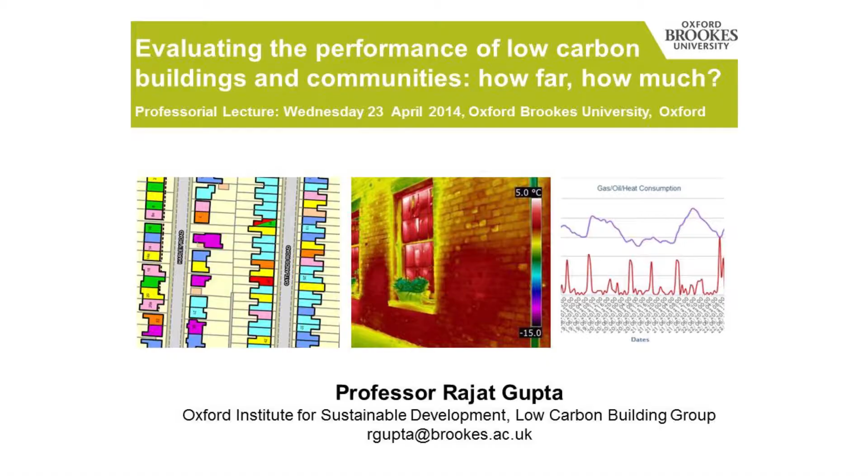What I want to do today is talk about evaluation of low carbon buildings in communities and look at that in some detail. I think we are probably beyond the point where we say, we should design sustainably, we should build sustainably. We have to. I don't think there's a choice. But how much do we evaluate the performance? That's why I've called it how far, how much.

What I want to do in the lecture is talk a little bit about our group. There's a lot of information in the refreshment area about our group, so you can find that, but just to give a flavor of OISD and our group. A little bit of background, linking climate change, energy use and buildings. Just lay out some research challenges within which we operate now and give some insights from our own research projects that we've been leading over the last few years. And then some final thoughts for future challenges and research.

So moving on to the Institute, quite a few familiar faces, quite a few people here who are from OISD. So I don't have to talk too much, but essentially to say I am based in OISD, I'm part of that as well. This is the university's flagship multi-disciplinary research institution, which brings together architecture, planning, real estate, and construction. So it was about 10 years back almost that it was formed as an institute.

And in 2008, a HEFCE report was brought out that regarded it as one of the UK's largest institutes. We are involved in most of the Research Council programs, whether it's sustainable urban environments, 1, 2, and 3 phases, energy research programs, living with environmental change, and also now lifelong health and well-being. A lot of information is there on the website, so I'm not going to go into lots here, but you will probably find something about sustainability at all scales within the institute.

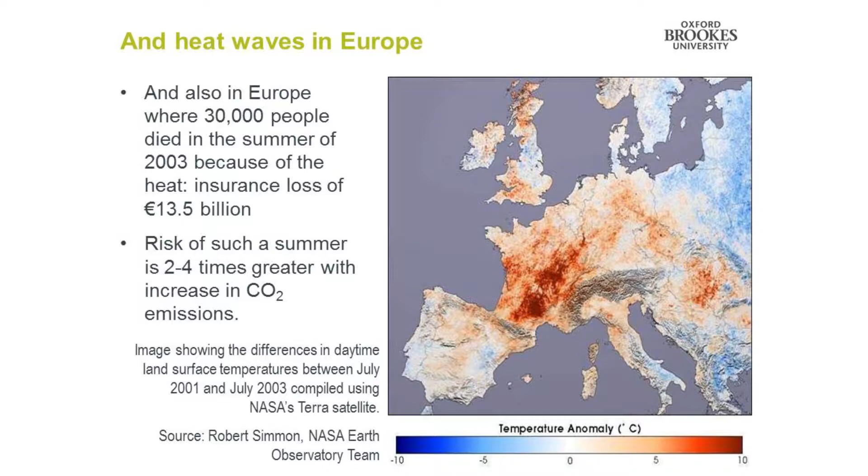Now, this is a slide you might have seen in many lectures. I think Sue and I probably started using it 10 years back. And these kind of impacts were felt that time. You would get flooding and other things. And then the 2003 heat wave occurred. And as you know, after that, something which we call excess summer deaths was coined as a term. And in this country, we get about 2,000 summer deaths.

And this kind of a summer, the current climate science confirms that this will become regular. So we have to be prepared to live in homes which are warm in winters and cool in summers as well.

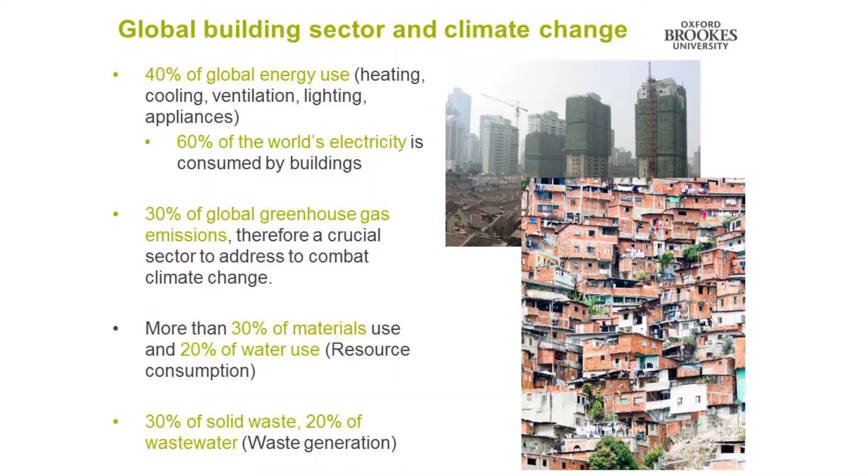Now again, why are we talking about all this? We're talking about all this because buildings are a large part of the problem. This could be anywhere. This is actually Beijing in China. And the reason is, if you look at the global building sector, 40% of energy use happens because of energy used inside buildings, because of things that we do in buildings. Buildings consume about 60% of world's electricity. About a third of global greenhouse gas emissions happen because of things in buildings. 30% of materials, whether you talk about resource consumption or waste generation.

So the point is, whichever angle you look at buildings from, the building sector is very important globally. And to be honest, the United Nations recognized it in their last report quite openly. And they said that the building sector offers the low-hanging fruit. Now, I don't disagree with them, but one of the things you have to be careful of is to come to this assumption straight away that reducing energy use is easy and cost-effective, because it might be cost-effective, but it isn't easy. It takes time, but it's important, not just for reducing energy use, for social reasons, economic reasons, for political reasons.

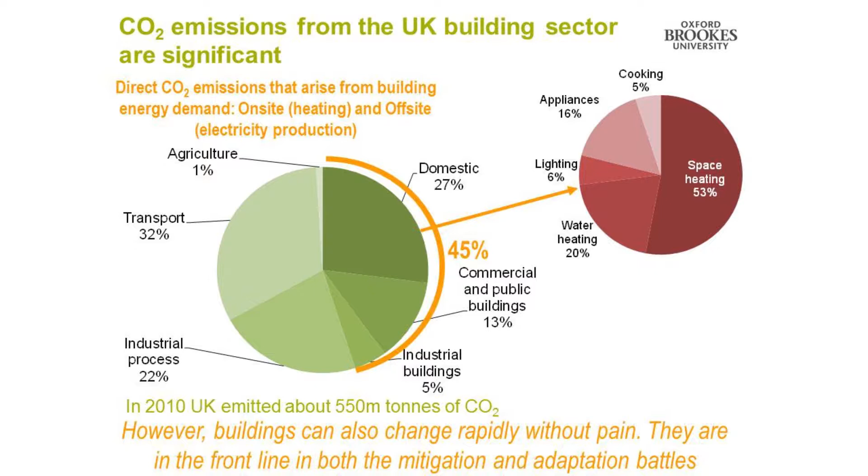Now, coming back to the UK, the building sector in this country is quite significant. About 45% of energy use happens in buildings, which is responsible for the carbon emissions. This can happen either when we heat the buildings, or when we're using electricity. Now, within the domestic sector, which is responsible for 27% of emissions, about 3/4 happens due to space heating and water heating, and 16% because of appliances. So building design is critical to achieving a good performance.

But the point is that buildings can also change rapidly without pain, and they are in the front line for both mitigation and adaptation. We spend about 90% of our lives inside buildings, so actually adapting them for the future makes complete sense.

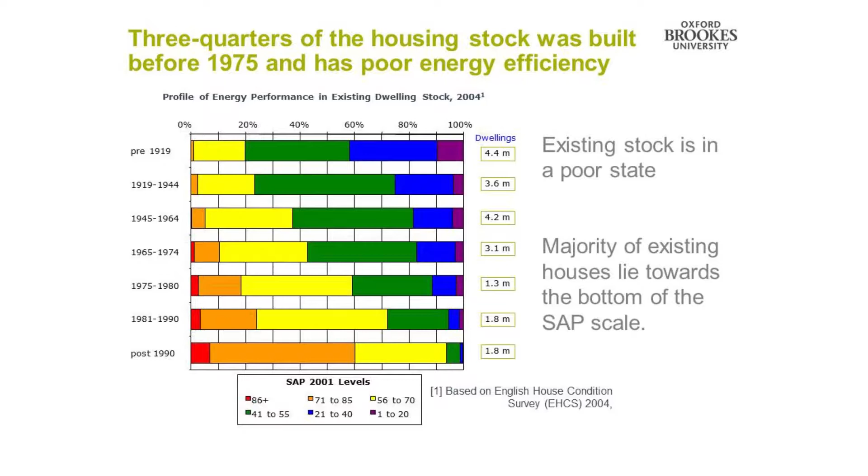Again, you might have come across this. This is an image showing the SAP ratings of UK properties. So in the UK, we have a SAP scale, standard assessment procedure, on a scale of 1 to 100. And as per the built form, you can see that most of the stock is actually in a very poor state. The red actually is counterintuitive. It means the SAP value is high. And that's a big job. The UK housing stock is actually the poorest in Europe. So a lot of work needs to be done to improve existing housing.

And there are drivers of change. Again, you may have come across this. The Climate Change Act, which requires greenhouse gas reductions by half in about 10 years, 80% by 2050, so another 35 years. And then we also have the UK Carbon Plan, which sets 5-year budgets for us.

But interestingly, one of the things it says is that by 2050, all buildings will need to have an emissions footprint close to zero. All buildings. That means 27 million houses and 2 million non-domestic. That's a big assumption they're making. It's there in the report. You can actually read it. The domestic sector is also required to reduce emissions by about 29% by 2020.

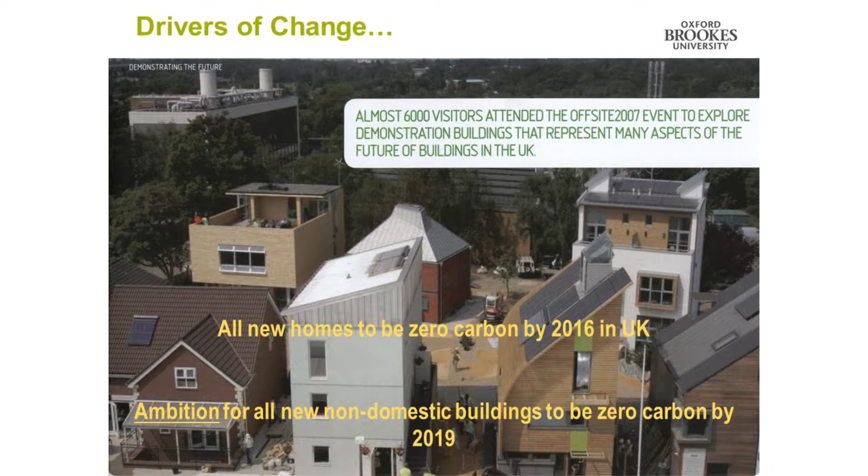So, lots and lots of things need to be done, which is why we have quite a bit of near legislation. The reason I call it near is because all new homes, for instance, need to be zero carbon by 2016. All non-domestic buildings, for instance, are required to be zero carbon by 2019. The government still has not defined what zero carbon exactly means. It's near zero carbon to some extent. But there is this ambition, target, aspiration, whatever we want to call it.

So the building sector is the centerpiece for a raft of legislation and a raft of government policy. And both existing and new buildings would need to be improved substantially. And that's where our research challenges come in. And I'm going to lay out some research challenges before I go into my projects. And first of which is the low carbon refurbishment context in itself.

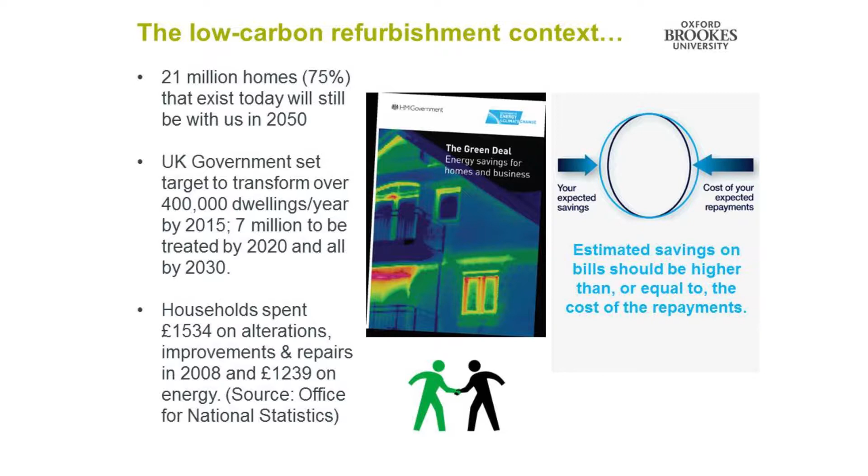As you know, we have about 27 million homes. 21 million homes will be standing by 2050, which means we need to do something about those houses now. Now, the UK government, interestingly, set a target. This is under the Labour government, actually. And the reason I keep this is because I think it is interesting to look at the scale of challenge. Over 400,000 houses a year to be done. So if you calculate 12,500 houses a week, that's just over one per minute. It's a lot that we are looking at in terms of improving the houses. So the challenge is quite big.

Now, we have to also put it in context of what people spend. On an average, people spent about 1,500 on alterations, improvements, and repairs in 2008. And that's the kind of money that people are going to spend to actually improve their houses. And we need to bear that in mind when we are designing these kind of programs.

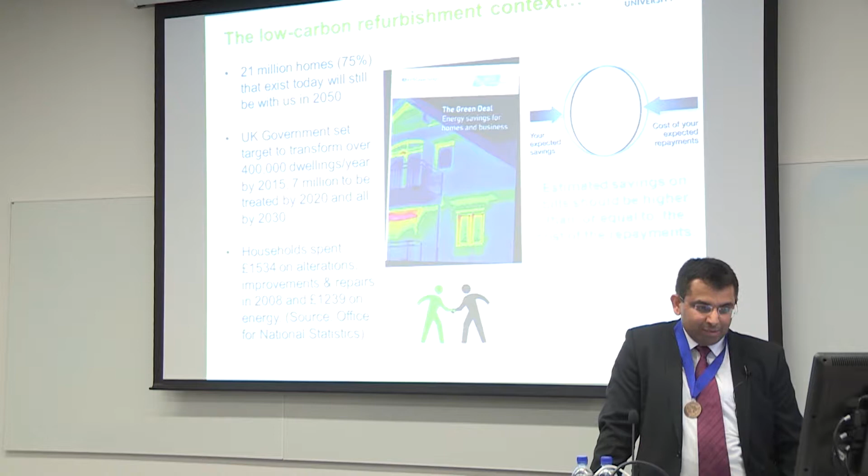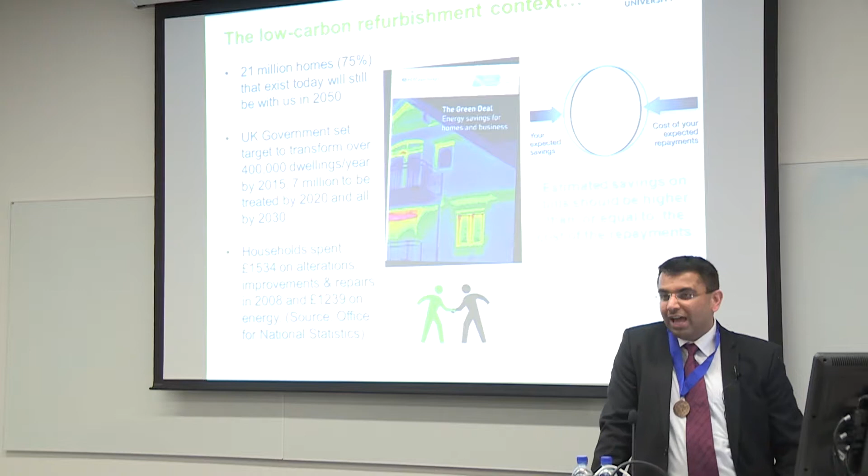Now, one of the things that you may have come across is Green Deal, which I'm not going to talk about in terms of judgment, whether it's been successful or not. But one of the things that Green Deal does is that it has a golden rule, which is quite fundamental to its success, which says that the estimated savings on bills should be higher than or equal to the cost of repayments, which means if the savings are not as expected, then people will end up paying a lot, and it is a financial model. So there is a lot of discussion about this, which is why the issue of performance gap comes in. But what is this challenge really?

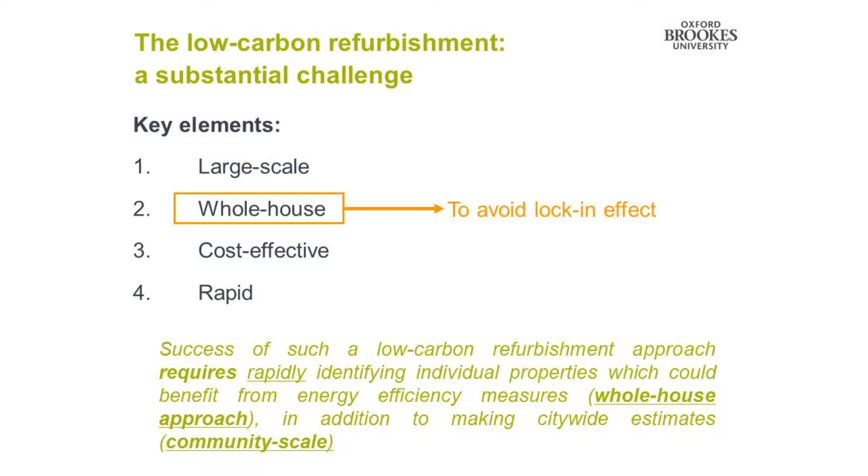We are looking at large scale, so I think it's not just about house by house. I've also always believed that if you have to do refurbishment, it's got to be whole house, because you spend a lot of effort in putting things together, putting up the scaffolding. It makes sense to do it. It also avoids something called lock-in effect. Lock-in effect is when you do unambitious improvements, so that buildings are not improved to their maximum or to their optimum level, and they underperform.

It's got to be cost effective, and it's got to be rapid, which is one of the reasons why my doctoral research actually looked at this, that we need to be looking at buildings in a way that we can identify the worst performing properties rapidly, in addition to making citywide estimates. So we need a tool by which you can say these are the houses that need to be improved, at what costs, and also at a city level or a community level.

But there is always a but, as you know. There's one big issue in reducing energy use in buildings, that it's a wicked problem. And as you know, wicked problems need wicked solutions. You actually can't solve wicked problems, you can manage them. And the reason why reducing energy use is a wicked problem are these three things, which quite a few people have talked about. Fergus Nicol said this some years back, that there is this dynamic relationship between buildings, occupants, and climate that determines energy use in buildings. So it's not just about technical improvements.

But then there is even more complication. People, building, and climate all come together to use equipment to provide whatever heating, cooling, lighting in buildings. Behavior is central to it, because all of that then works with behavior. And then the energy use itself can be determined directly by occupants.

They can open the window if the heating is on or the mechanical ventilation is on. So it needs a multi-disciplinary approach. You need a lot of disciplines to work together. Simply architects and engineers aren't enough. We need sociologists, psychologists, physiologists, and many others, economists, to work together, because it is a wicked problem. And it's very important to bear this in mind.

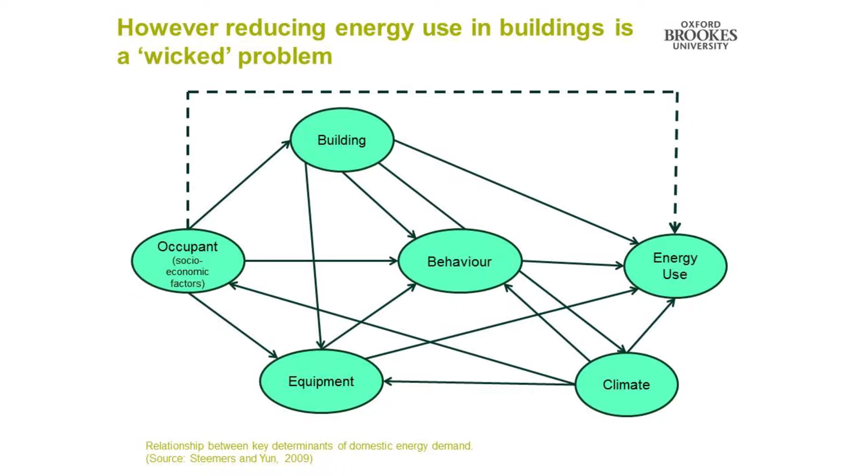I think when Steemers and Yun did it, they didn't realize actually the potential of what probably they had done. But I think this is a phenomenal advancement in our understanding of energy use in buildings. And that's why we get something called an energy performance gap, which is, some people say, an unintended consequence, but is it? Looking at the socio-technical system of buildings.

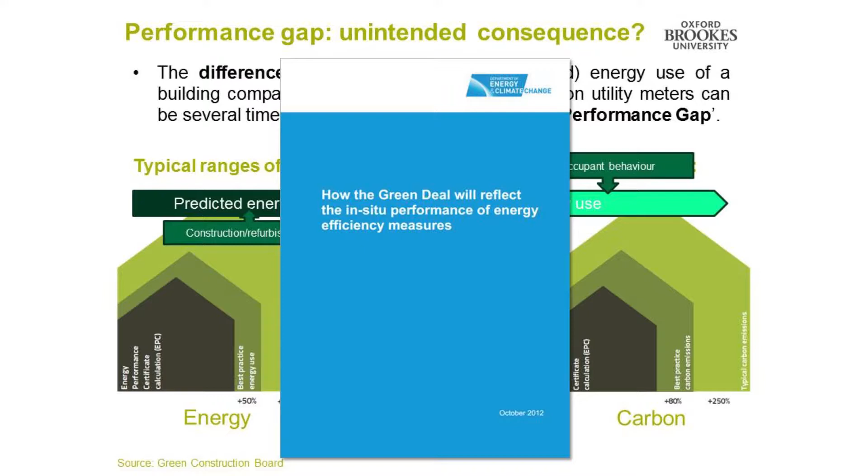Now, what is it? I'm going to talk about energy performance gap, but I think I need to define it first. It's the difference between the modeled energy use of a building, or the predicted energy use, compared to the actual energy that's recorded on utility meters. And it tends to be several times greater, not just one or two, several times. It is because of how the building is put together or refurbished, and occupant behavior, and a number of other things.

The Green Construction Board did some work recently, and they found that in non-domestic buildings, in terms of energy use, typically a non-domestic building will be using 200% more. 200%, that's a lot. In terms of cost, 240% more. Think of the accountants who are trying to estimate how much the running costs are. And in terms of carbon, about 250%. And I think they are pretty conservative. You can actually get much worse than that.

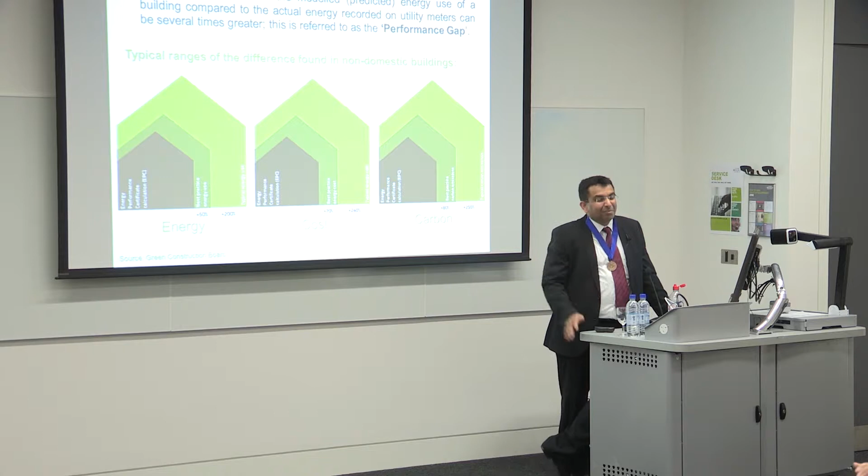So this is beginning to come into the system now. People are beginning to notice it. Whether something is going to be done about it, we don't know. But something is being done about it in Green Deal. Actually, this came out last year, and it came out very quickly. After Green Deal came out, the government released this, which said that people have to use correction factors when they are trying to estimate energy savings.

So if somebody is trying to calculate savings from cavity wall insulation, they have to drop the savings by 35%. Because of the performance gap, because we don't know what happens. And don't ask me why it's 35%, not 32%, because nobody knows why it's 35%. It was just seen as a convenient number. There isn't really proper science behind it. And that is why a lot of work needs to be done to quantify this energy performance gap. But it is beginning to be recognized. It is not something that is being ignored.

And it's widespread, but how does it matter? Sometimes people ask me, okay, it's there, but why does it really matter to us, people living in houses? It does, because if you look at it, and I think Zero Carbon Hub had done some good work in this area, one, it undermines the policy itself. So effectively, we are saying that you save virtual carbon, not real carbon, if you don't do it properly, and there's no feedback, and the building isn't followed through. It questions the role of even new housing, whether we can achieve our targets.

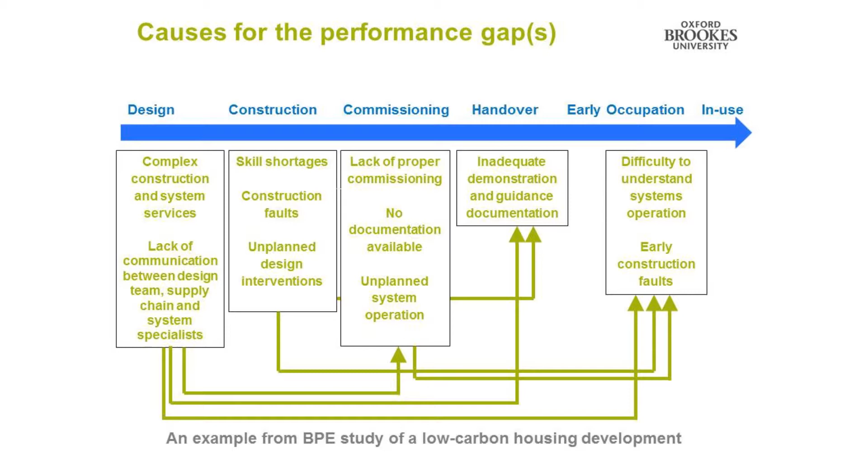Now, the causes are plenty, and that's what my whole presentation is about. So I'm just going to give you a summary of the causes. The causes are not because of occupant behavior only. I think that's a myth. Occupant behavior contributes to it, but it is not necessarily the main cause. It actually starts right at the design stage because of assumptions, because of lack of proper communication between teams, because of using unskilled or semi-skilled people to build things.

Big issues with commissioning, not just not commissioning properly, but the tools that are used for commissioning themselves aren't calibrated. There's no proper handover of the design intent to the user, so people don't have a clue how the building is to be used. This is very, very common. Hardly a user guide. Has anybody seen a user guide for a building? See, one.

And I know Mary because she works in the field, and two. Again, there's a big lack there. And then, of course, there are issues with the in-use stage and occupant behavior. But before we come to behavior, there are a lot of things in the chain, and that's what we've been trying to study. Now, the other thing we can't ignore while we look at reducing energy use and the rest of it is about adaptation, resilience, and other things.

And one of the key things that comes in is overheating. We did a project on climate change adaptation for suburban neighborhoods, and we would ask people in Delphi groups and focus groups about drought, flooding, and overheating, and damage because of storm. And people would always tell us, or most of the times, that we can see water, so we can do something about it. We can't see heat. And that's quite important, because I think that's where legislation becomes really critical, because the threshold for dying could cross without the person knowing. And that's why in Paris, quite a few people in the top floor flats actually died in their own houses in 2003.

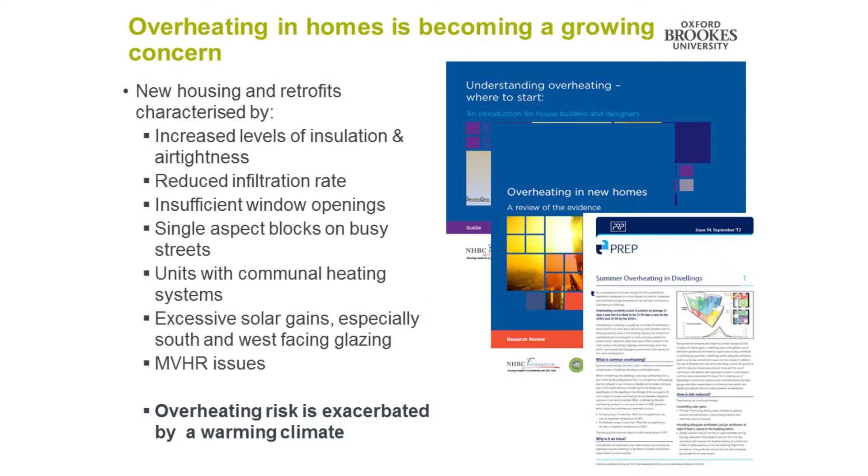Now, overheating is becoming a problem because, the first time I talked about overheating, I think somebody said, in this country, overheating cannot be an issue. It's all about heating a house, not overheating. Well, it is a problem because, one, we are building airtight houses, or at least we assume they're airtight. There's reduced infiltration rate. Window openings are becoming insufficient. I think window design is actually not good at the moment. You could have single aspects. There are issues with mechanical ventilation not working. Houses are also becoming smaller. The floor to ceiling height is reducing. So there is less space for stratification of hot air.

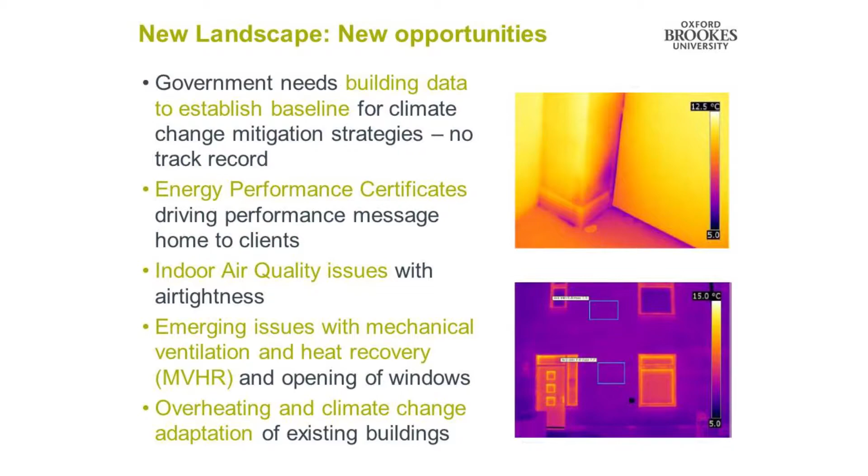And this gets exacerbated by a warming climate, where we're expecting temperatures to rise by about 2 to 5 degrees by the middle to end of this century. So this is again an issue that we can't ignore. So there's a new landscape, there are new opportunities, and that's where we operate. It is changing, but I think it's important that it changes. For instance, we need building data. We have to look at indoor air quality, and of course, looking at adaptation and performance of buildings itself.

Now, as I said, we have 20-plus projects. I'm not going to talk about them all. They are in these areas. I'm going to pick a few of them and talk about them. I'll probably start off with some of our international research, because John had kindly mentioned some of it, and I think it is important that we know what's happening outside of the UK, which is important for the UK itself.

I worked with the UN to develop this tool called Global Common Carbon Metric, because my PhD was on carbon counting. So I really wanted to develop a tool where anybody could measure and report carbon emissions of any building in the world. So the tool is very, very simple. What it does is that it can measure and report emissions. So you put in the area of the building or area of a city. You tell it whether it's domestic or non-domestic. As soon as you give the location, it looks up the carbon factor and generates indicators like kilowatt hours per square meter per year, and even kilowatt hours per occupant per year.

It has been applied widely, close to 400 square kilometers now, and it's being developed into an ISO standard as I speak. What it does is it provides a consistent way of counting energy use and emissions from buildings, so that we can baseline it and measure improvements against that baseline in a consistent manner. It's very transparent, but it works, and I think that's what is more important for us. As John had mentioned, we used some of this to develop the carbon neutrality standard by BSI, which is now having an improvement as well.

And then if we look at what's happening in terms of control and regulatory instruments, I think plenty is happening. The problem is implementation, probably. There's a lot there in terms of legislation and voluntary targets as well. But one of the common things I found was that there's a lack of consistent energy and buildings data across the 3 countries. That's common. Even in this country, we don't have good quality energy and buildings data on which to formulate energy policy. It tends to be for policy evaluation, not for policy formulation. So I think it's really important that data collection and analysis is now inbuilt into the systems of countries.

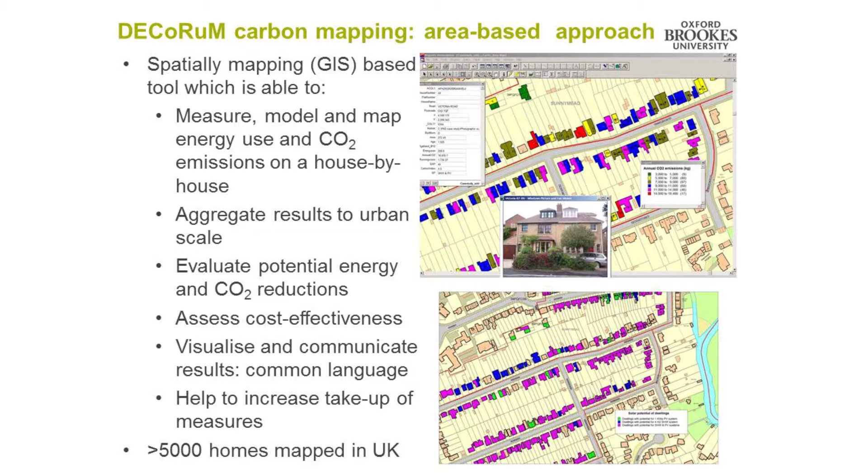I'll come to DECoRuM because that is the foundation of our work. And what really does DECoRuM do? It is a spatial mapping tool. So what I had done in 2005 was to bring 2 quite different fields, energy modeling and spatial mapping, together. And the reason I did that was because we wanted to empower cities, local authority planners, energy advisors with a tool by which they could model, measure, map energy use on a house-by-house level. So it doesn't do disaggregation. It does aggregation bottom-up, but doesn't do a top-down disaggregation. It's a very bottom-up tool.

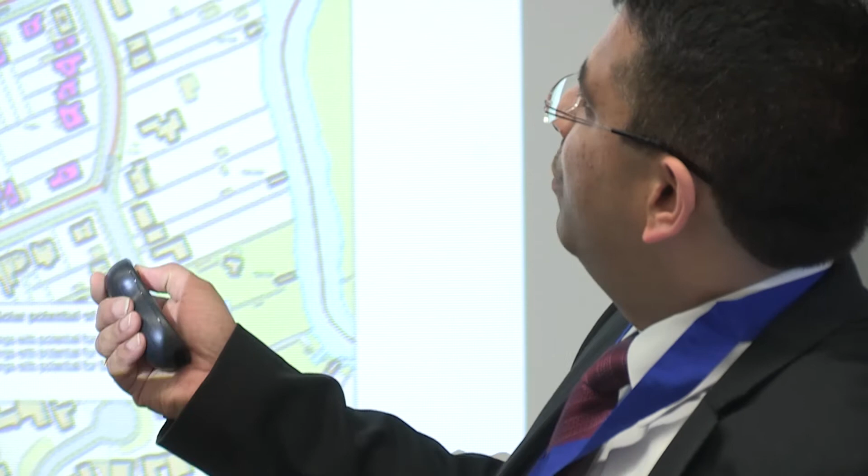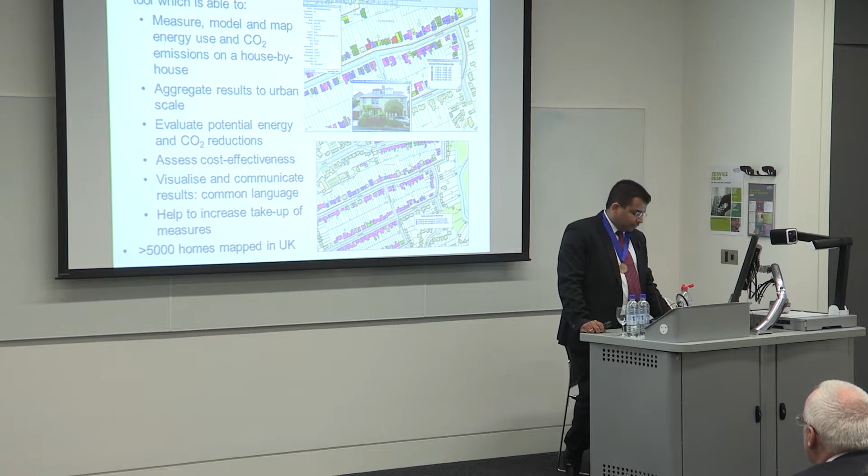It evaluates energy use and reductions on a house-by-house level, assesses cost-effectiveness, visualizes this, and sometimes even helps to increase take-up of measures. And to date, we've almost mapped about 5,000 homes in this country, some in the US as well. And primarily what the tool does is you can actually identify hotspots of, let's say the red ones are some of the houses which could take up measures. And then on a house-by-house model, you can run what a house can do in terms of energy savings and at what cost. But then we've now progressed it quite a bit.

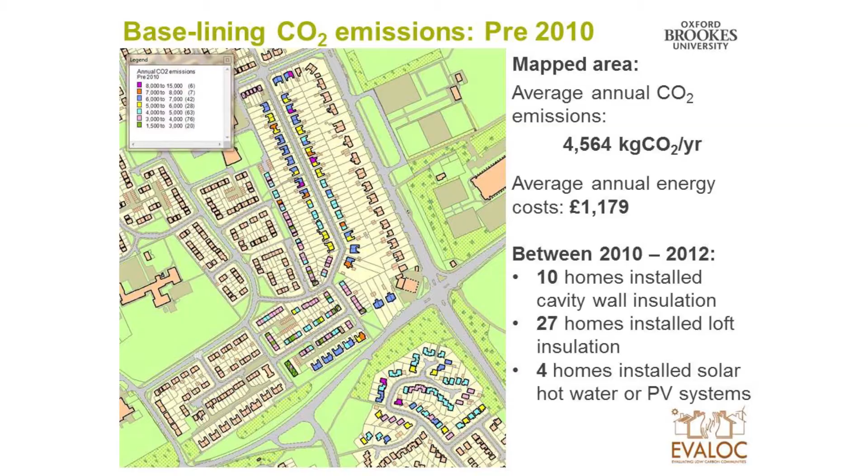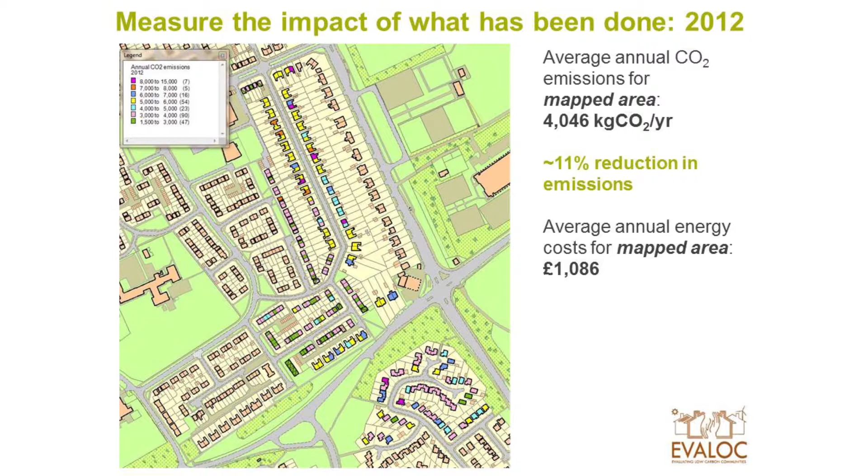This is what can be done, right? The model can also be used to identify what has been done. So we're working with community groups to identify what their baseline is. And with community groups, you have to shift the baseline because their action was taken in the past. And that's been a really interesting experience. So this is one of the community groups we are working with where we established that pre-2010, before community action started in an area, these were the average emissions, about 4.5 tons. And then some improvements happened. These are standard improvements, happening randomly in a community group. An 11% reduction in emissions over 2 years has been retained. So we are able to actually look at that in terms of what has been done.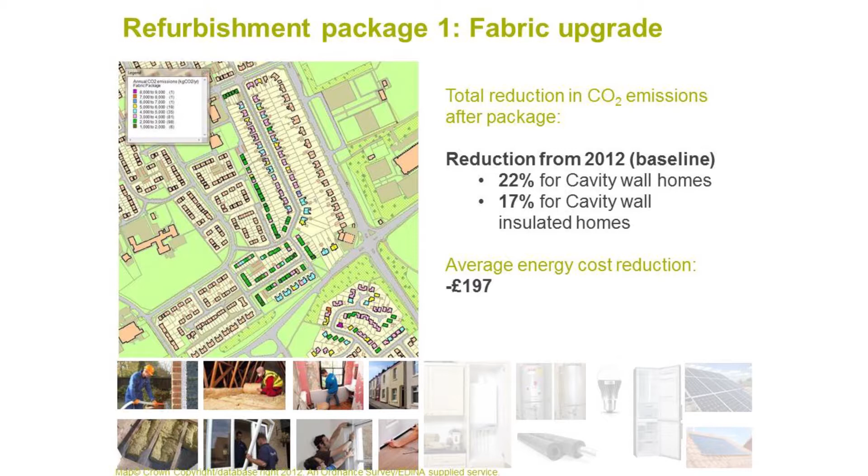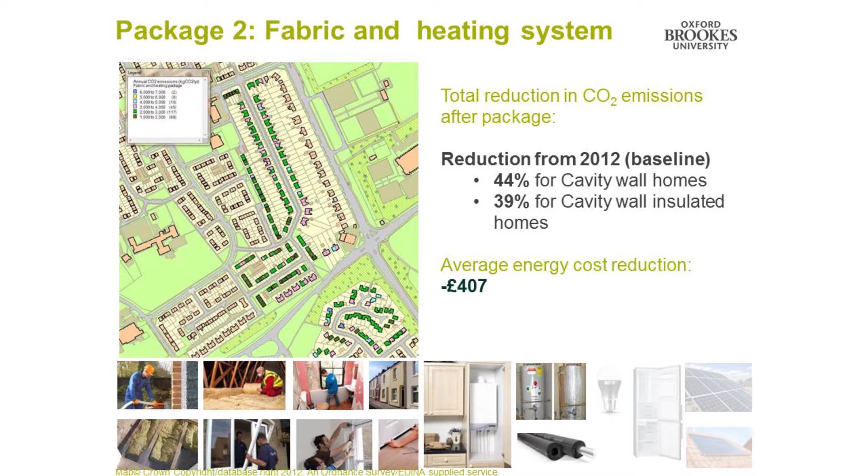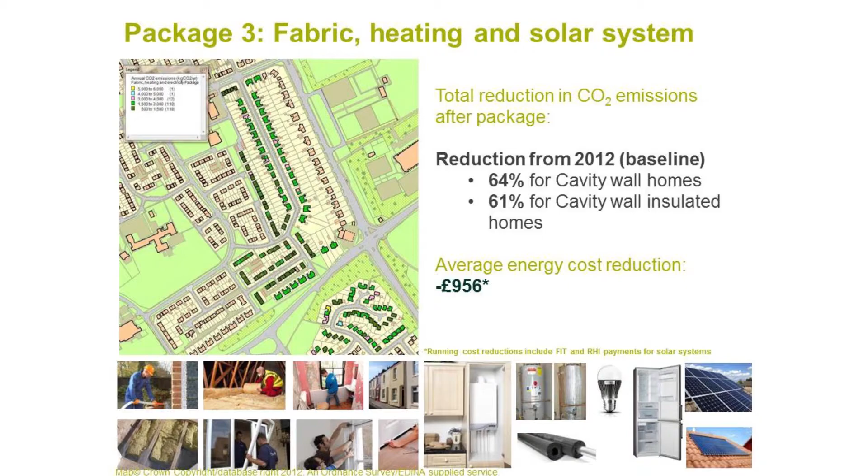We can also look at what can be done from there. So we work with community groups to create these community carbon maps. So you can actually see if we did a standard fabric upgrade, depending upon the kind of house, you could save about 10 to 20%. If it was the heating system, then you save slightly more, up to maybe 40%. And if you add a solar system, then even more. And that can be done at an aggregated level, or you create house archetypes. So people come to us in those community groups, and we can tell them if you're in that kind of house, you could take this kind of action, these would be the savings, and so much is the cost. So it's quite important to have these tools because they're very visual.

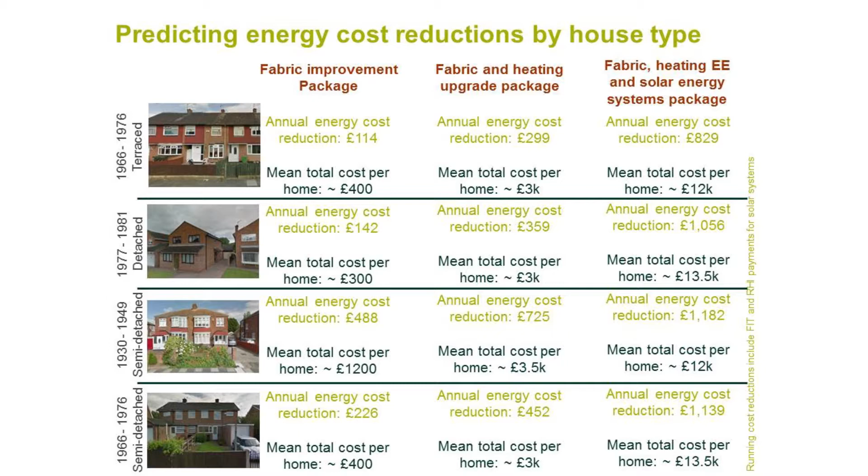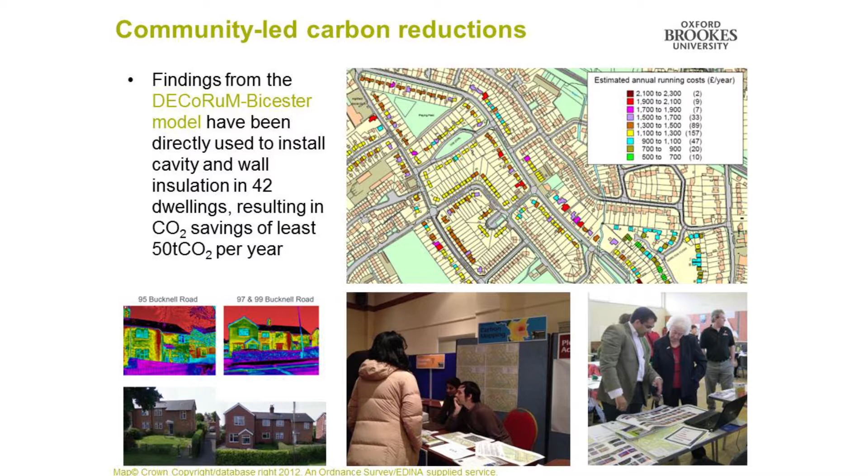We were very surprised because a few years back, a community group in Bicester actually took it up. What they did was they took the map house by house and contacted 126 householders. 42 of them installed the measures, or agreed to install the measures. I thought that was a step forward. I hadn't actually visualized it could be done. But mapping has the power of engaging people and bringing them together. And we've now combined that with thermal imaging on the ground, and we're trying to link it with aerial thermal images as well, and probably satellite data soon. So to do retrofit at scale, you need techniques which can scale as well. This is the project called EVALOC, which is evaluating low carbon communities.

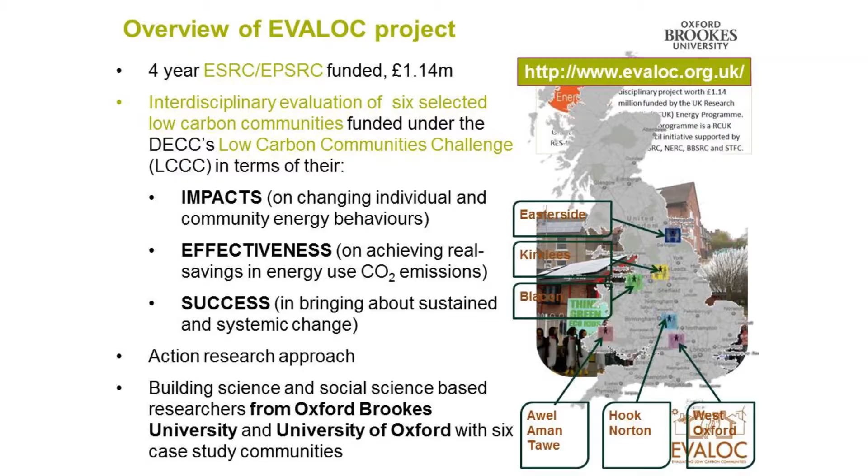And this is an ESRC, EPSRC funded project with colleagues in Oxford University. Essentially we're working with 6 community groups over the last 3 years now, evaluating them in terms of their impacts on changing behaviors, effectiveness in terms of how much reductions happen, and success. And we've adopted an action research approach, which means we don't have to just observe them. The subjects can be part of the research, and we can contaminate them, in effect. That's action research, which is great.

Importantly, it actually brings together building science and social science, which is difficult, believe me. It was a challenge to understand the language, but now we do. It is much better in the end, I would say. Difficult to do, but much better results. Including West Oxford, we're working with 6 community groups across the country. We've done a lot of things.

I'm not going to go into them, but essentially we've organized 12 focus groups to work with them to understand where they've come from, where they want to be, and what stage they are in. We've organized about 18 community events, from knowledge sharing to show and tell to using arts within a climate change scenario. Various meetings. We've also run energy display libraries and trials. So we've installed energy monitors to see whether there is a change in behavior.

As you know, every house, every building will have a smart meter in this country in about 8 years. It should have been 6, but it's been postponed a bit. So it's quite important that we look at that. We've carbon mapped about 2,000 houses. We've done a bit of social network analysis to see who people are talking to, where the energy discourses are happening, and map them. It's quite interesting to see one house on a street and then how it grows from there. And then we are doing very detailed monitoring and evaluation, which I'm going to talk about in a bit.

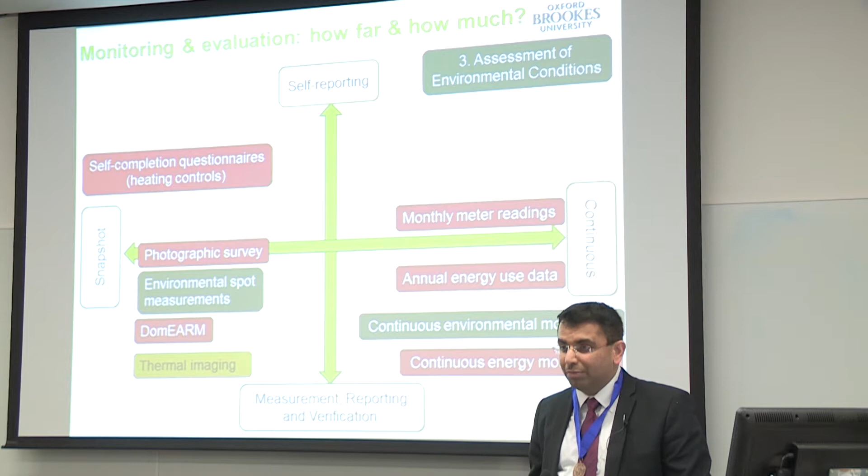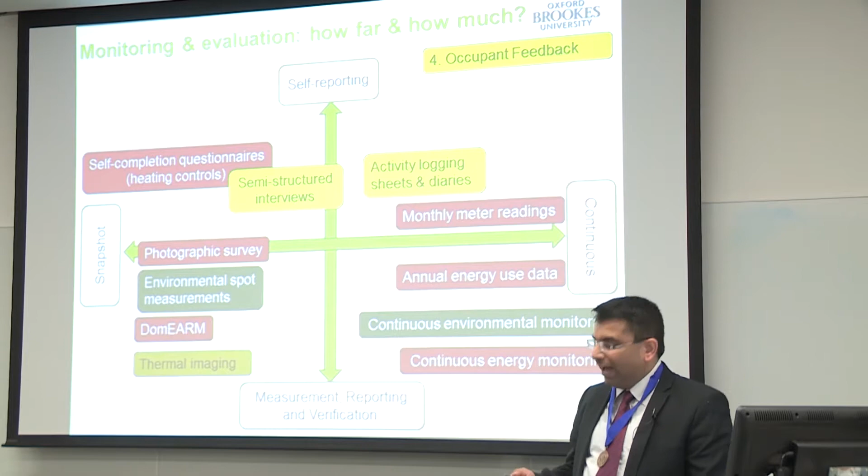If you talk about assessment of energy use and user interaction, some of the techniques could be continuous, others could be self-reporting. So we have a very mixed methods approach. Looking at remote monitoring, so temperature, humidity, CO2 levels, door and window openings within these houses. And also combining that with qualitative analysis, looking at feedback from people and communities themselves. It's important to have a framework, because then you realize how much you're doing, for what purpose and what it will lead to. We want to avoid over-evaluation, certainly, and we also want to avoid survey fatigue.

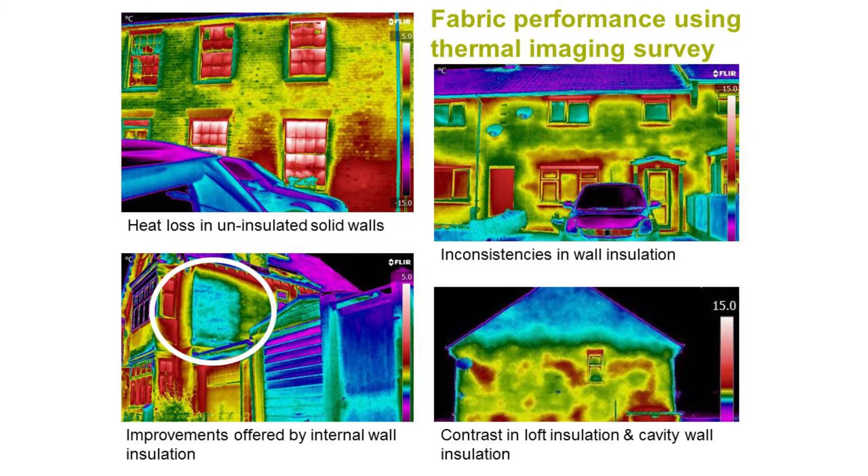Now I'll show you some of the things that we actually have found. Now, they aren't different, interestingly. These are houses where standard refurbishment measures have been installed with some low-carbon technologies. So inconsistencies in wall insulation. This house has had cavity wall insulation, but you can see there are inconsistencies. Red is not good. As dark as possible is good. Red shows heat loss. This house did part insulation of one of the rooms, but then the other rooms are now beginning to lose heat.

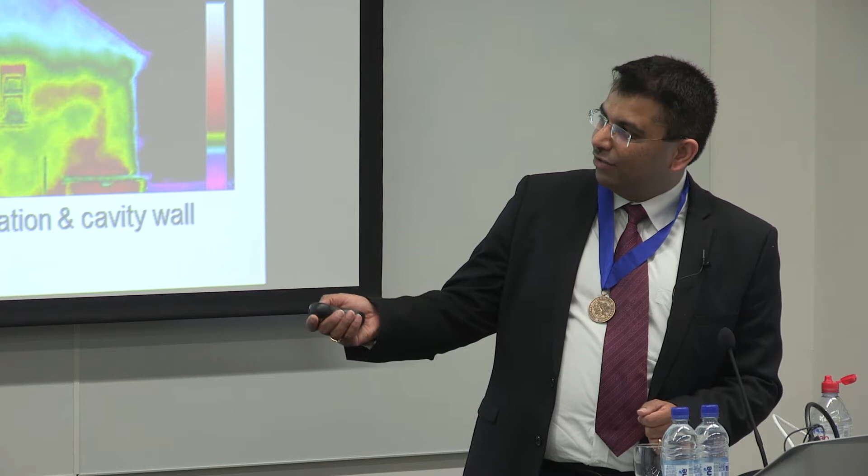There's a weak link. We're working with about 88 houses, out of which 27 houses have had not quite deep refurbishment, but substantial refurbishments. And we've looked at them over 4 years, and their median change in electricity is about 9%, and the median change in gas use is about 16% reduction. And it is interesting because most of these houses have had either solar PVs or heat pumps. The ones that have heat pumps have actually increased their electricity use a bit, because of course you've shifted the energy vector. Some decrease because of solar PVs as well.

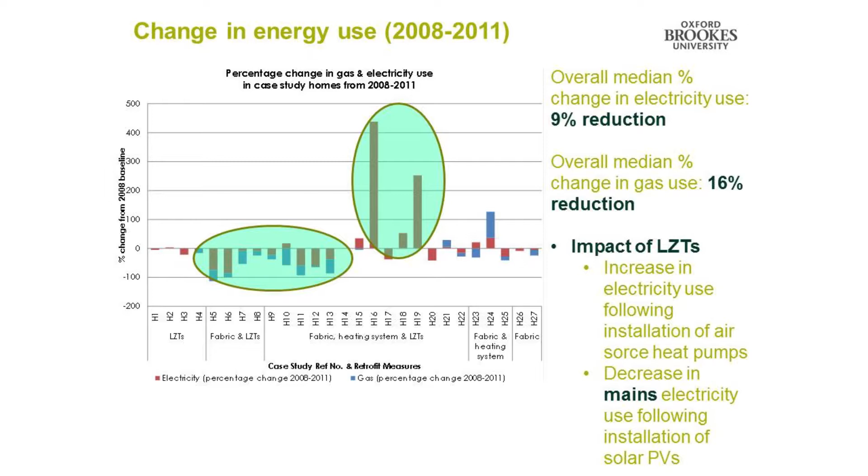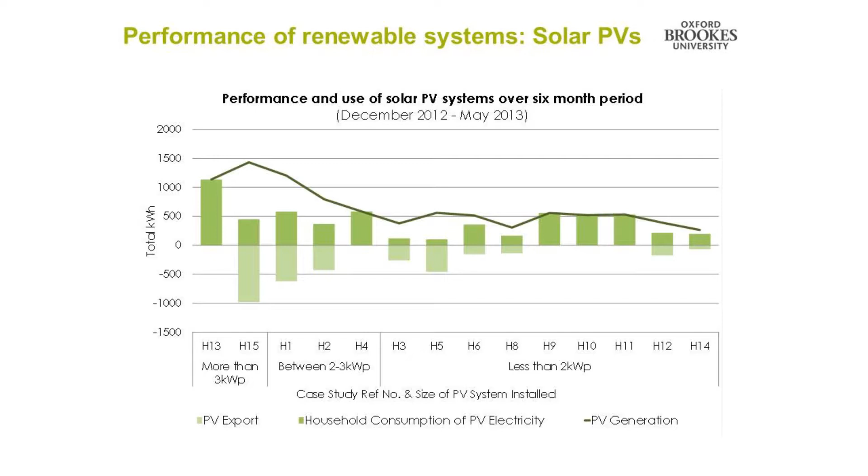So these are quite important things at a substation level, or even at a higher transmission level, for electricity use particularly. Most of these houses have had solar PVs, and what this shows is generation. The line shows total generation. The bar on the top shows how much is used, so self-consumption of PV, and how much is exported. Now that's quite interesting, because we are in the age of feed-in tariffs.

And what we suggest to people is the more you use of what you produce, the better it is, because you don't have to buy it at a higher rate. And it depends on occupancy profiles and other things, of course. And there's a big variation here. So you can see many people are just exporting most of it, and there's some people who use quite a bit as well. And then that's quite important for demand profiles as well, which I'm not showing.

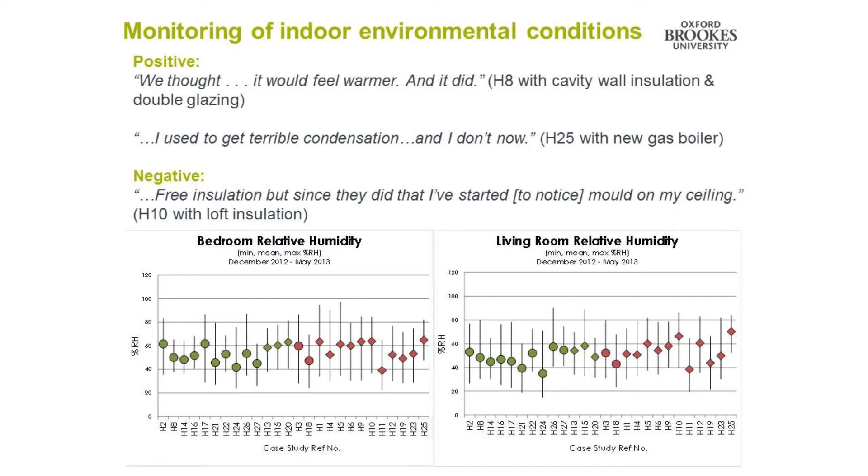But now when we monitor indoor environmental conditions across these houses, if you look at, for instance, temperature in bedrooms, you can see there's a big variation. The mean is somewhere between 15 to 20, but the variation is quite high. Some houses are even going above 30 degrees. And the same for living room.

And look at what people say after the refurbishment. Some say, we thought it would feel warmer. But others say they start to notice mold on their ceiling, so there are some unintended consequences. Reasonably good humidity levels, more or less, in these houses, but a big variation sometimes. As you know, humidity needs to be between 40 to 70%.

Now let's look at attitudes. What happens when people have these systems? Because that's what we want to understand. What is the people interaction with these technologies? So when it's been sunny, I've thought, oh, it's going to be free, so I'll put the tumble dryer on. So that's an unintended consequence. We didn't use a dishwasher for a couple of years, but now we do because we've got the solar PV. There are also positives, of course, not just negatives.

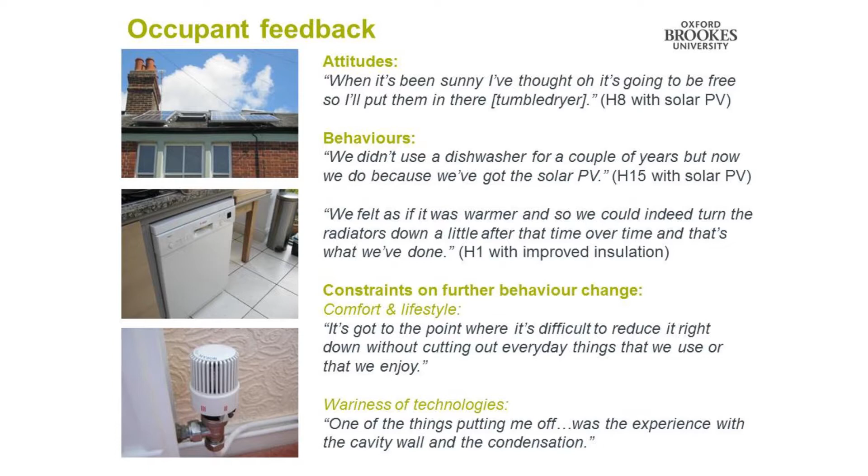But it's important to look at how difficult and challenging it is to change behaviors and then sustain them. I think the point we're trying to make is that if you have these technologies installed, it's very important to also give behavior change guidance alongside as to what needs to be done and followed through as well. And this project actually figures in the community energy strategy. If you've not come across this, there's a national community energy strategy now released. And EVALOC is actually one of the exemplar projects within there, and there's a website to look at that.

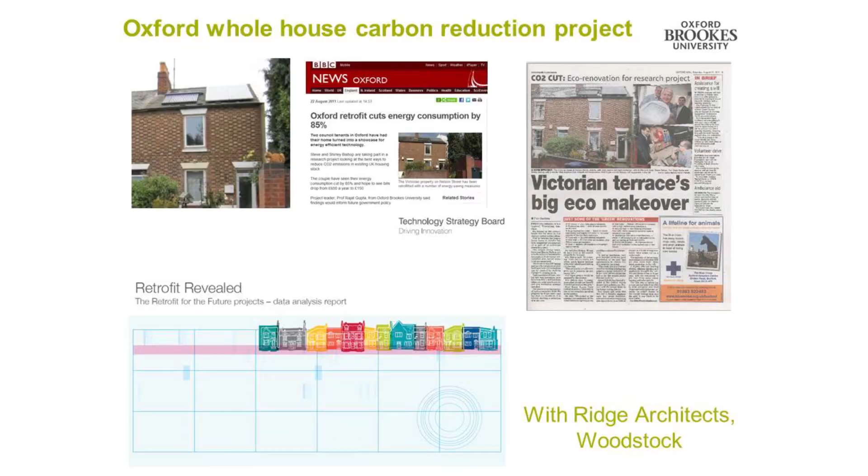Briefly, I want to touch on some of the low carbon refurbishment work that we've been doing. And this is quite a well-known project. This is in Oxford, it is in Jericho. It achieved above 80% reductions in reality. And the reason it did was because we engaged the user. I'll be very honest with you. All the other technologies were quite similar to what people use. It targeted 16 kilograms CO2, so there was a massive reduction in energy use.

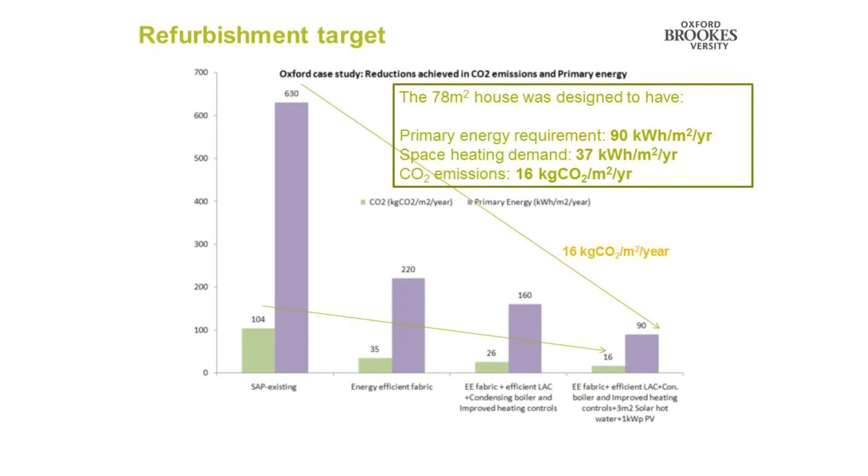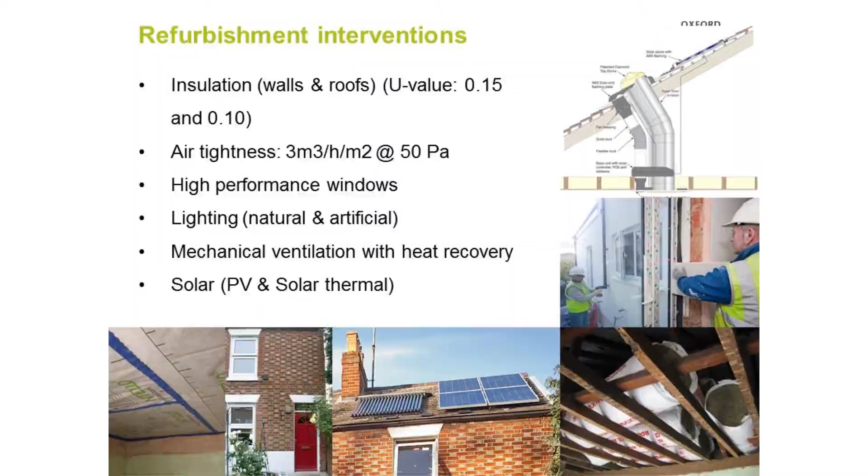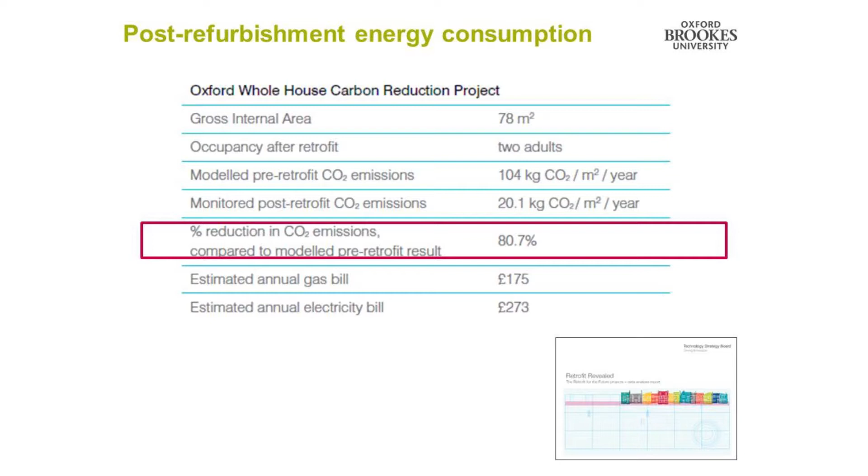I don't think we used out-of-the-world technologies. They're quite simple. Well, people who are involved in this field will find it quite simple. But I think we did them well, and we followed through right from the design stage through construction and in use. And that really helped. Well, the TSB takes this as 80.7% reduction, so that's what we had over the 2 years. Not sure if it will be sustained as 80%, but it was a massive reduction. Remember, this is an R&D project. I'm not saying every house needs to be done like this. It's just an example.

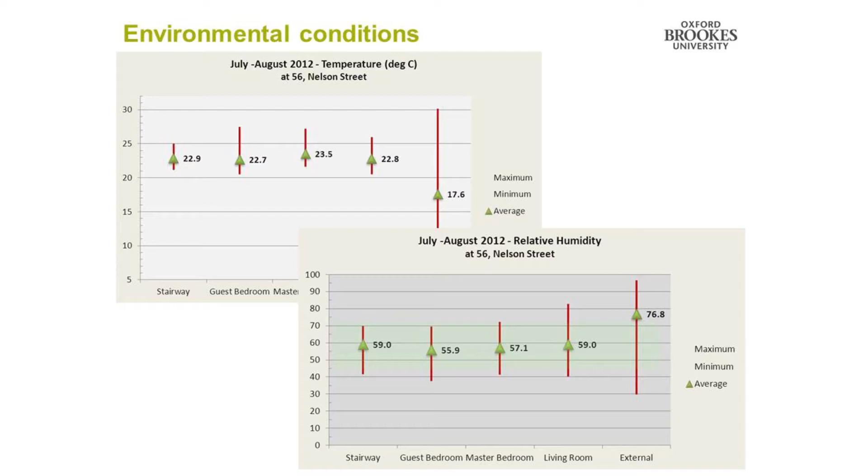Reasonably good environmental conditions. Before the refurbishment, the householders had internal temperatures of 14 degrees. And our models failed because our models were predicting 21. And the reason was there's something called pre-bound effect. If people know that they can't heat their house, they're not going to. People are very intelligent. Whereas, after refurbishment happens, people tend to just drive up the thermostat a bit.

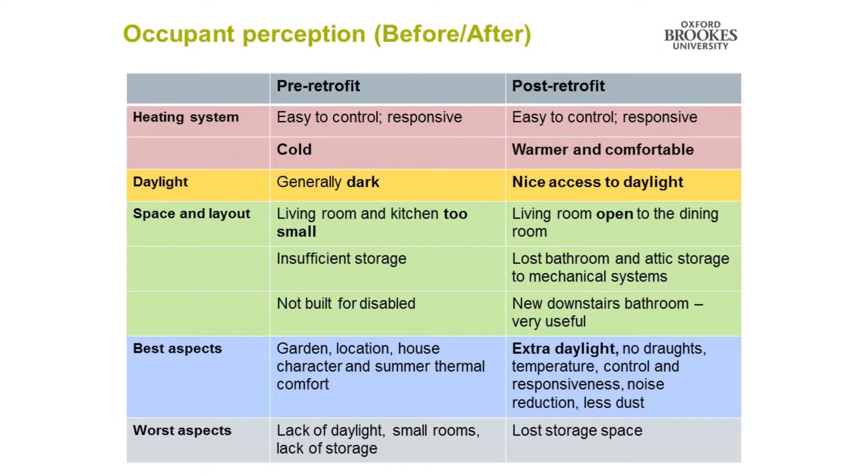And before and after occupant perception, they find it warm and comfortable, but they've also lost storage. And I think that's something we have to be very careful about when we refurbish these houses, because a lot of kit goes in, and we have to be careful that we don't put a lot of stuff in them so that people lose their basic things.

This is another project. This was a 1990s terrace in London. Much more difficult to do, because the starting point for the previous project was about 80 kilograms CO2 per square meter per year, so I think easier to get to 15 or 16 kilograms. This was 44 kilograms CO2. So this is reasonably done well.

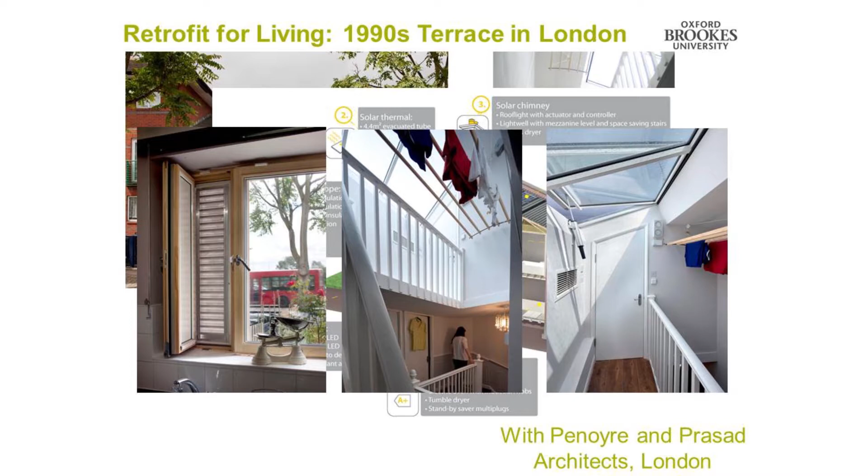It's a 1990s. And I think what we did here, we followed a similar approach, but we did some different things. One of which was we had these secure windows inbuilt for climate change adaptation, for avoiding overheating. This is a naturally ventilated house, and very happy occupants.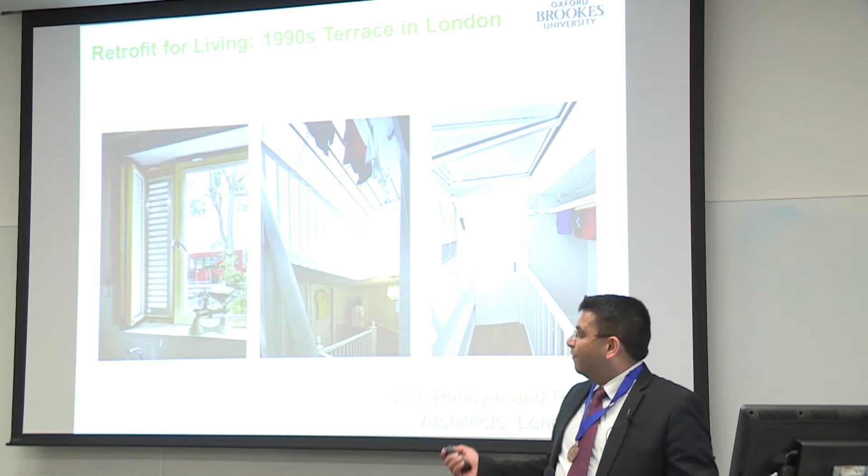We put in this ventilated light well to encourage people to dry their clothes. And actually she started to put her baby here, so I expect it's a very comfortable space for her. It's got a lot of breathable insulation as well. It didn't achieve 80%, but did achieve 60%. So I'm not saying 80% is what every house needs to achieve, but there we are.

Now, I think the other thing that people might be interested in knowing here is our work on BPE, which is the Building Performance Evaluation. And we have lots of projects. We have over 15 projects running at any given time. There are a lot of techniques. We can monitor things every minute if we want, and combine that with qualitative and quantitative.

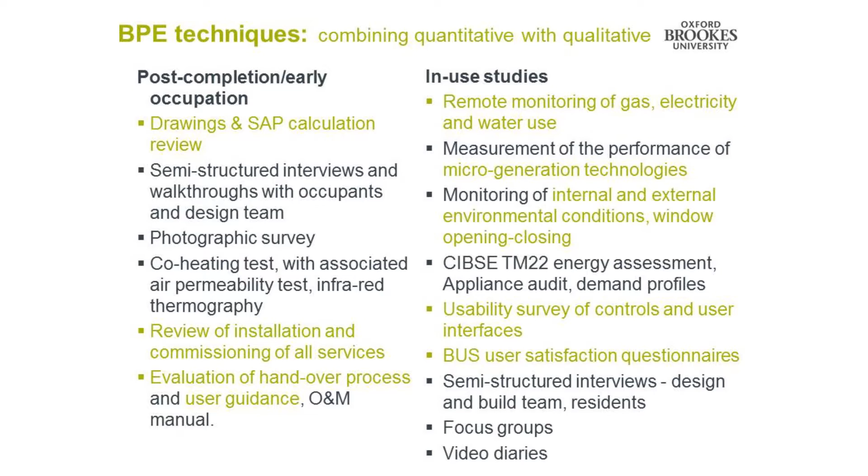But I think what's important is to actually go into the projects, because this is what you will probably like, but also be worried, I think, with the results. In fact, be very worried with some of the results. Now, these are all high-performance housing. They are designed to level 4, level 5, so near zero carbon. Quite close. Maybe I shouldn't have named the places where they're located, but anyways.

They are by mainstream social housing developers. So these are not people who want to really change the world. These are people who are doing this because of code compliance. They're required to do it to get funding. We've been studying some of these houses for 3 years now, right from the design stage, so there's a substantial amount of data. This is what the design is.

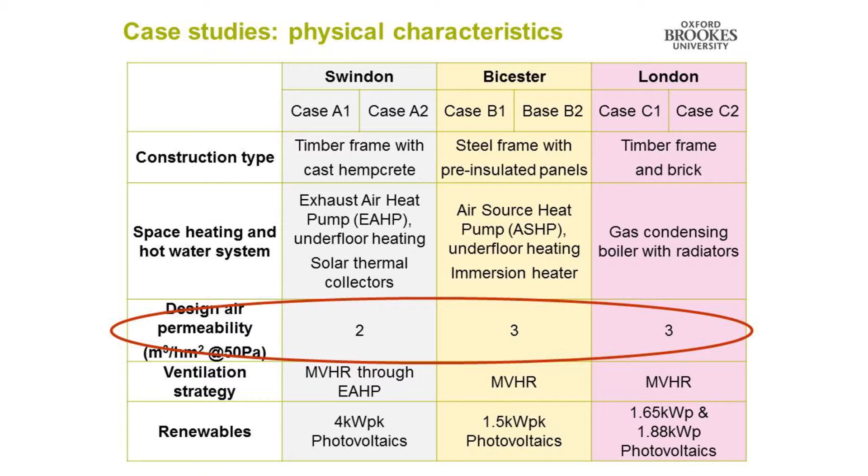So they were designed to very high air tightness levels, 2, 3. At that time the building regs was 10, so considerably high air tightness. All of them have MVHR systems because they were designed to a very high air tightness level, with PVs and everything. Okay, let's compare the design and actual energy use. That's the designed energy use of these. So we are studying 6 houses across these developments.

That's the enhanced model, because remember, models don't count everything. So if you compare a SAP model with actual, it's a wrong comparison because SAP doesn't count everything. You have to improve the SAP by adding lights, appliances, and other things, and cooking energy use, which it doesn't count. So we've added it here. And now let's compare it with the real. And you can see some of them differ by a factor of 3.

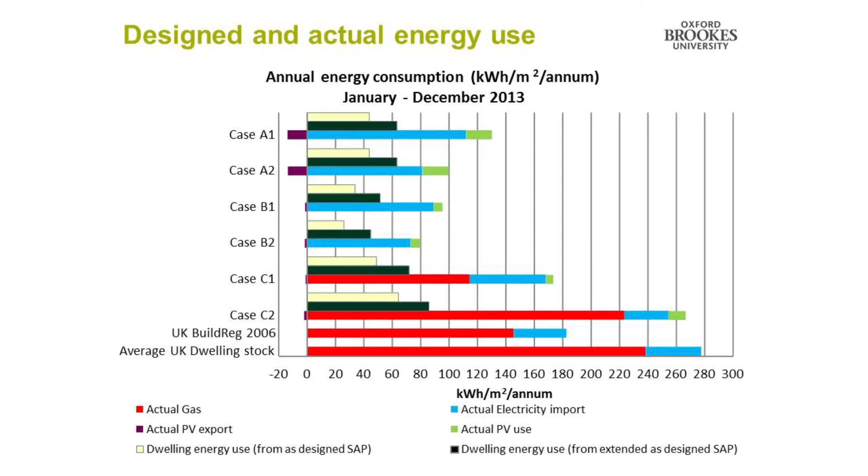This house, for instance, is no different from the average UK dwelling stock. And this is fairly common. This is not something which is special to these houses. There are various reasons. If you convert that into carbon, it gets even worse because electricity is 3 times worse than gas, and most of the houses tend to be electrically heated. So a slight increase in electricity means 3 times worse in terms of its carbon impact. So that's where we are. Are we really saving real carbon or virtual carbon?

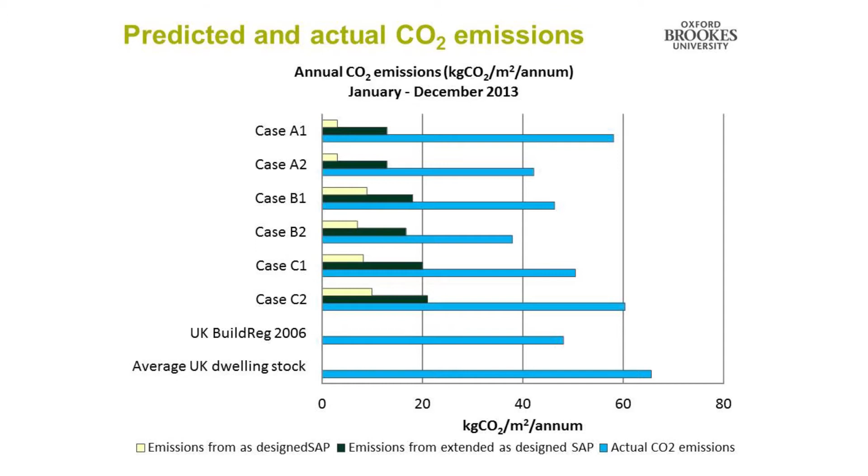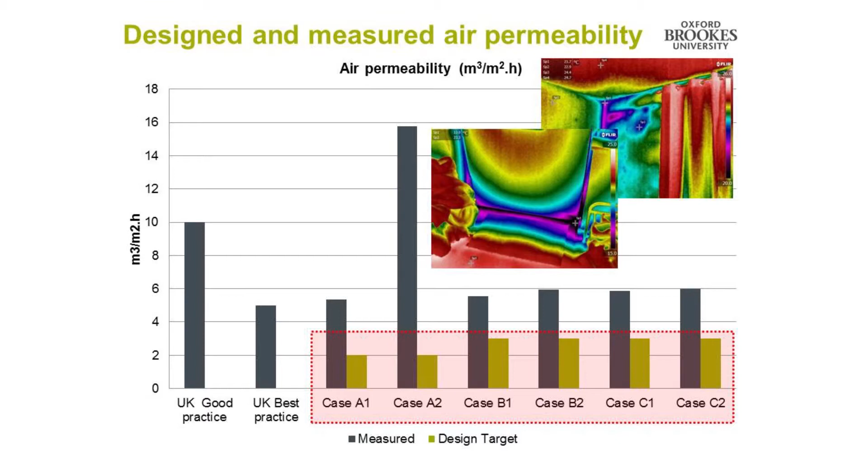Reasons. Now I'll quickly give you reasons. These are the 6 cases. Firstly, look at what their designed permeability was versus actual; one even fails. One is 15, so that's failed building regs as well, actually. But most of them, interestingly, are in the range of 4 to 6, which makes me think that actually the building industry is maybe at the stage of building to 4 and 6, at which level you don't require mechanical ventilation. So that means these houses have had kit installed which is not needed, running 24/7, adding to electricity use, which leads to a lot of carbon.

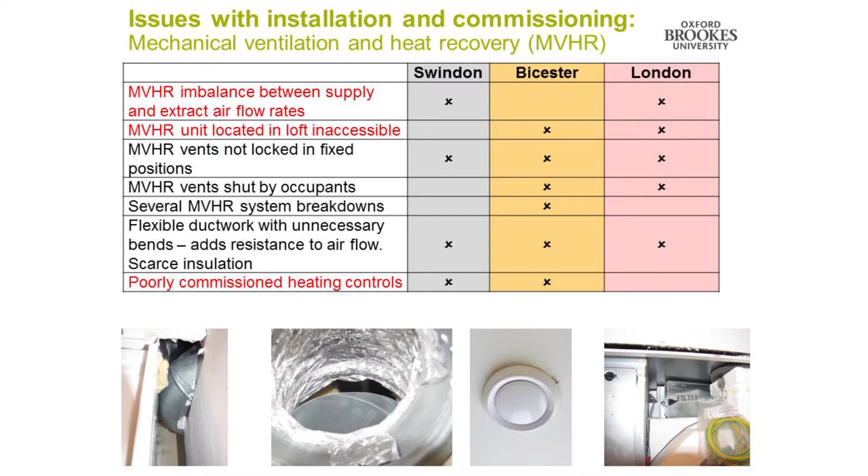So there are lots of interdependencies happening here which need to be considered. Massive issues with ventilation, heat recovery. Look, this duct is not even connected to the terminal. This is fairly common. Again, I'm not trying to do builder bashing here. I'm just saying that this is fairly common in what we see. So this user: I do not like cold air blowing onto me when I'm sleeping, I'll close the terminal. So effectively, this person has closed the outlet, which means they don't get enough airflow, so they'll open the window, which is also equally good, but that affects the whole balance of the house.

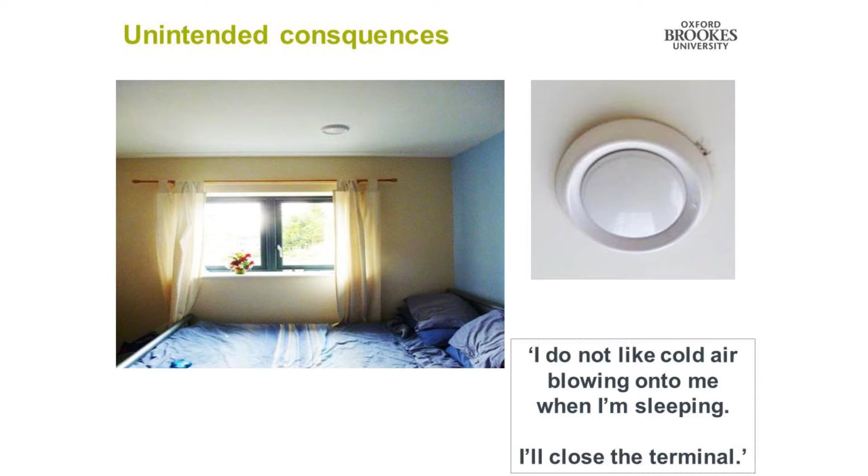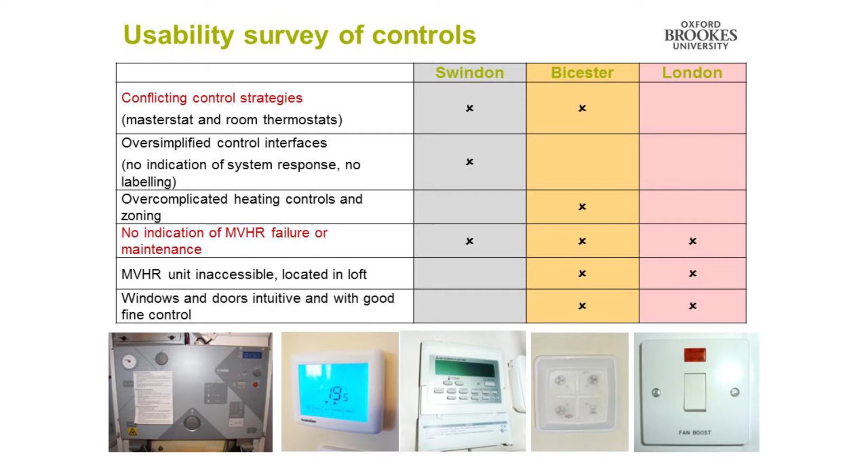Another, user expectations. In a warm house, the thermostat is set to 31 degrees, 31, and the windows are open. Again, this is fairly common. This is not unusual. Because I think we are moving to warmer houses where our expectations are increasing phenomenally, and is it a case of worry, or is it just habit? Maybe it's just habit. Then if you look at user controls, enough work has been done on usability now to find out that most of the controls don't work. We don't understand them. The system response isn't clear. They aren't accessible. That could be heating controls or ventilation controls.

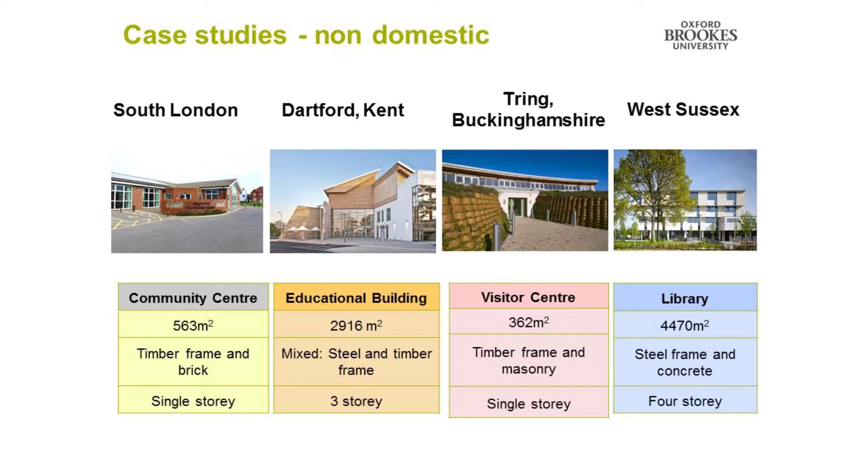And the same thing happens in non-domestic. So I can show you building after building. We have over 50 buildings in this case. Interestingly, these are all civic buildings. I've chosen all buildings where you have a transient population as well. And again, the same thing happens. The difference between design and actual is phenomenal.

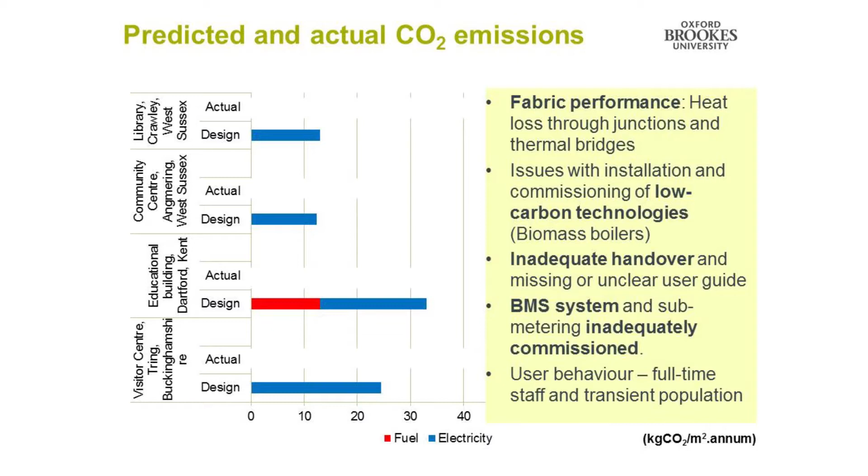And these are the reasons: issues with fabric, issues with commissioning of stuff. So services and systems are not commissioned properly. BMS and submetering not connected. So the first thing we do in BPE studies is connect them. And then you come into user behavior. So plenty has happened before these things arise.

So I'm almost going to end. A few more slides. There's a lot of stuff to talk about on the difference between design and actual. But there's another thing which is coming our way, which is overheating. And I've just picked up findings from our research project called SNACC. Without going into the detail, it was a long 3-year project, so I could just talk for another 3 hours

on this. But one of the things we found interestingly is until the 2050s, in cities such as Oxford, Stockport, and Bristol, you could have passive ventilation depending upon the emission scenario you look at. So opening the window and shading the glazing. Again, it depends whether your house is south or west or east facing. Most of the homes could be adapted, some may not, until the 2050s. After that, some amount of mechanical cooling may be required. But until then, it can be done.

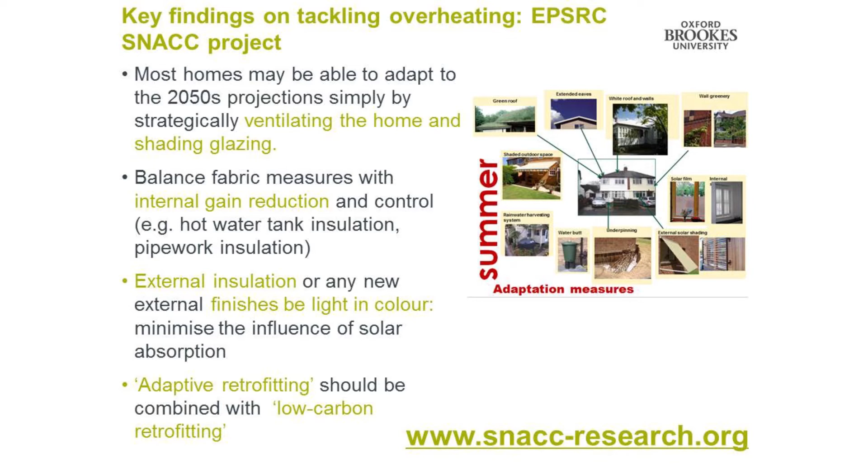There are also similarities with mitigation. Again, insulating pipes and other things internally reduces gains, and that's important. Community heating systems sometimes enhance overheating, so they need to be carefully considered. External insulation, light color, this used to be very much prevalent in Australia, where you have high albedo effects from external surfaces. And we need to combine adaptive retrofitting with low carbon retrofitting. This is really, really critical.

And one of the big impacts of the project, it finished at the end of 2012, so it's been a year, was we created these maps for overheating. We looked at 6 neighborhoods across the 3 cities, and created maps of which houses would overheat in the 2030s, 50s, and 80s, and then what could be done. The green ones are the ones which could be adapted. The red ones can't be adapted, for various reasons.

But interestingly, it actually formed the evidence for the government's work on overheating in homes. This led to the National Adaptation Program, where this project figures. So the evidence has been taken up. A lot of research has been written into scientific papers. But for me, the most important thing was that it informed a little bit about Green Deal.

One of the things we got in was that with Green Deal assessments, there is no overheating risk analysis done. And at least the assessors should be trained in identifying overheating risks. Because what you don't want to do is solve one problem at the cost of the other. And that's quite important for us. So I think it has had some impact in that sense.

So now, final thoughts before I end. Where are we heading to? One of the things we've been working on is combining mapping, which is very close to my heart, of course, with monitoring, and seeing whether we can develop an approach which can be urban scale and also house by house, because one size doesn't fit all.

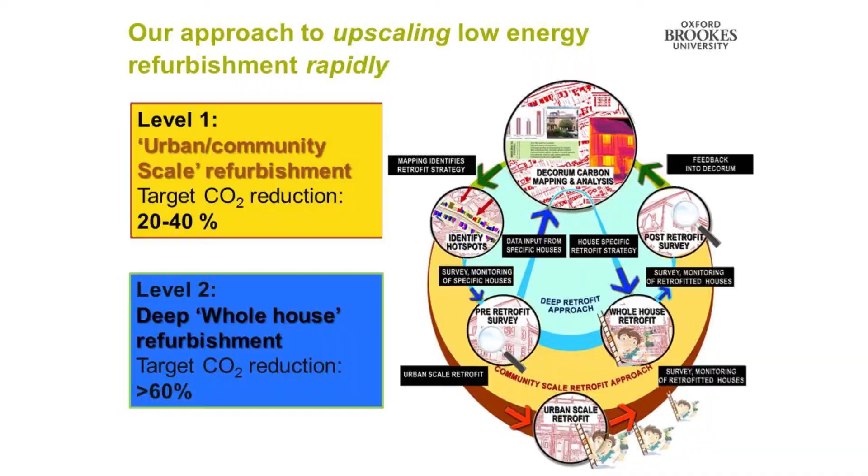But then there'll be some people who would want to do a whole house retrofit, and they should do that, and that would mean that an analysis is done prior to retrofitting, so in a detailed pre-retrofit survey, in-use characteristics of both occupants and the dwelling are assessed. It feeds into the model at this stage, because it improves the predictions straight away. And after the retrofit is done, again, there's a detailed monitoring analysis, and it feeds into the model, so that this becomes like a management system for improving buildings.

And that we call a deep retrofit approach. Some people call it advanced retrofit as well. The second thing that we've been really struggling with, and I think we are about to publish this, is a protocol for building performance evaluation.

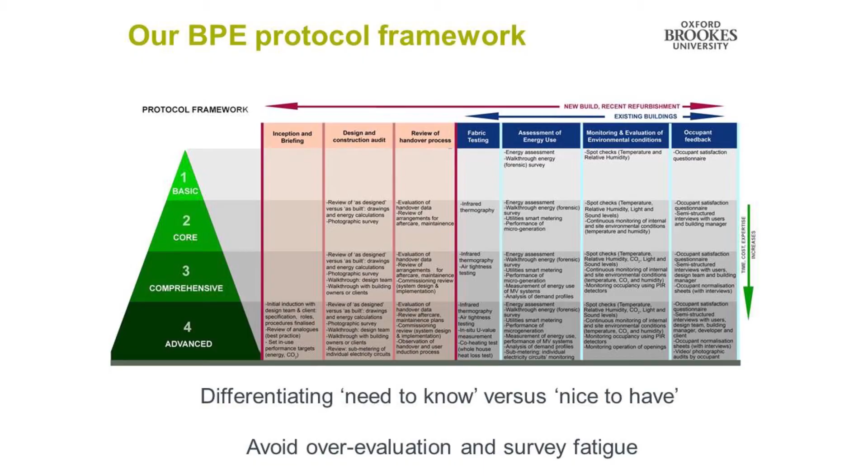We've moved from no evaluation to a lot of evaluation, and I'm very passionate about differentiating between need to know versus nice to have, and avoiding over-evaluation survey fatigue. So we've developed this protocol of what needs to be done for existing buildings, what should be studied, and what should be studied for new buildings and refurbishments, let's say, and at what stage.

So what is really, really critical, and at a basic level, what you could do for all the buildings, let's say, which are improved; at a core level, a little bit of detail, maybe 10 houses out of a development of 50. Third is comprehensive, so maybe this is done for relatively fewer houses where innovation is happening in terms of materiality or technologies. And then advanced, maybe for the prototype buildings, which is done right from the design stage and taken through.

So the fabric is studied in detail, the design and construction audit is studied, substantiated by monitoring, interviews, and analysis. This is about to be published, but I think we need a kind of protocol to understand this. What is essential and what isn't.

The third thing that we've been working on, which I think is quite important, because it brings, probably for the first time, people and energy data together. We've got a project through the TSB Future Cities Solutions Competition to develop an open source data platform for energy and buildings. That is all of what we had to do. But what we've done is we've developed user profiles, because we feel different user groups in cities have different tools that they want and different motivations that they have.